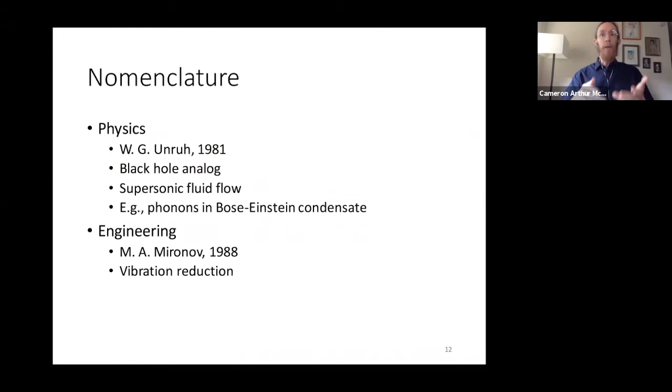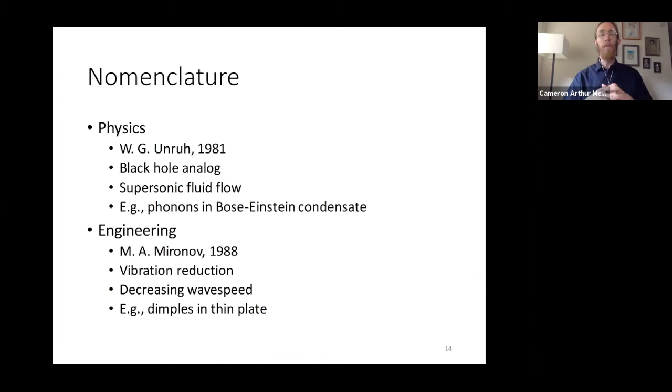In the field of engineering, the idea of acoustic black holes was first proposed by Mikhail Mironov in 1988. It's useful for vibration reduction, and it's based on the idea of a decreasing wave speed in a thin beam or in a thin plate. Some examples in a plate might be if we have some dimples in the plate, and it's a means of modifying the structure to get useful vibration properties out of it. Obviously, we're going to be focusing on the latter meaning of acoustic black hole, and so that's what we'll be discussing going forward.

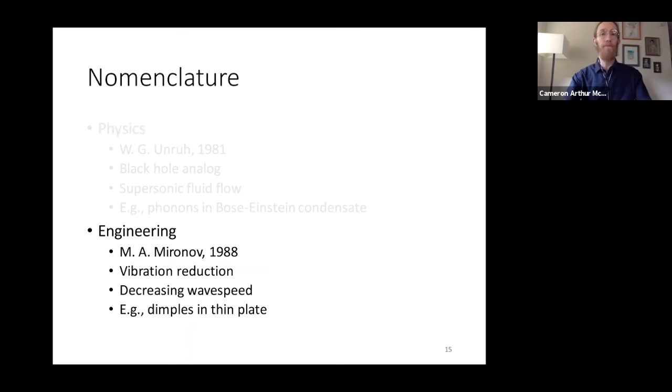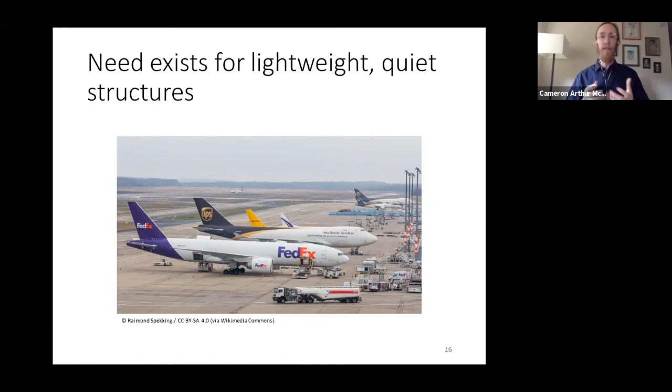I probably don't need to tell anyone here that there exists a need for lightweight but also quiet structures. It's a classical problem where we want lightweight structures that are also stiff, but that makes them effective radiators of sound. Here I have some airplanes pictured. You can also imagine that in addition to sound, we want to reduce vibration because increased vibration will wear on components and shorten their lifespan, and this is something that we want to avoid.

A common solution to reducing vibration in these thin and stiff structures is to apply some sort of damping material to it, but this damping material then leads to an increase in weight, which again is suboptimal for the consideration that we want to keep it as lightweight as possible. And so-called acoustic black holes promise a potential for significant vibration reduction, but often will lead to a net reduction in overall weight.

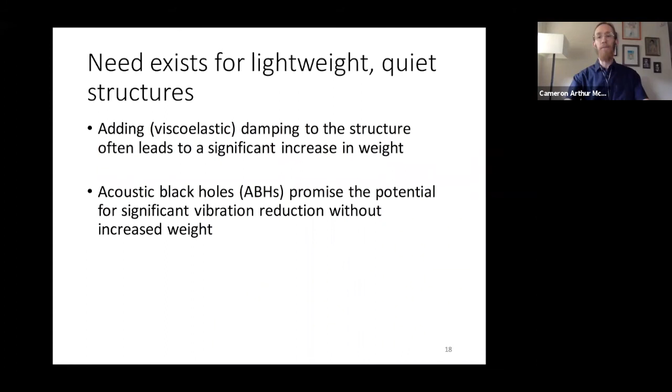The idea is if you imagine a thin beam or a thin plate, and we have a bending wave coming in at an incident direction, if we taper the thickness of that plate, then the properties are going to change over space. So if we start at some incident position, x sub I, and we go towards the origin, and it's tapered according to some profile, we can say that the transit time of this bending wave from the incident position to the origin is going to be related to 1 over the group speed. And that itself is proportional to the square root of the thickness, which is to say that as the thickness decreases, the speed of the wave also decreases. So it gets slower as it moves along.

So we can calculate this. It's going to vary over space, so we take a spatial integral. It might not be obvious, but in particular, if we have a quadratic power law, then in theory, as the thickness goes to 0 at the origin, the transit time, the time it takes to go from x sub I to the origin, goes to infinity. So it increases indefinitely.

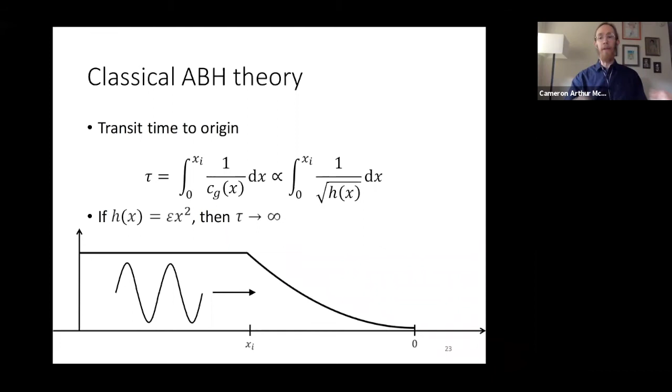Similarly, we can, using some geometric approximations, define the reflection coefficient as e raised to the power of the negative frequency times eta, which is the loss factor of the material, times this transit time. And so you'll see that as the transit time goes to infinity, the reflection coefficient goes to 0. And so this is the idea of an acoustic black hole in the ideal case.

Now, of course, if we have some non-zero truncation thickness at the end, then our reflection coefficient is going to be greater than 0. And in fact, in materials like many metals that are actually used in practice, where the loss factor is relatively low, oftentimes the reflection coefficient is going to be very nearly 1. And so this acoustic black hole effect seems to be spoiled. It seems that we can't get this acoustic black hole effect that we want.

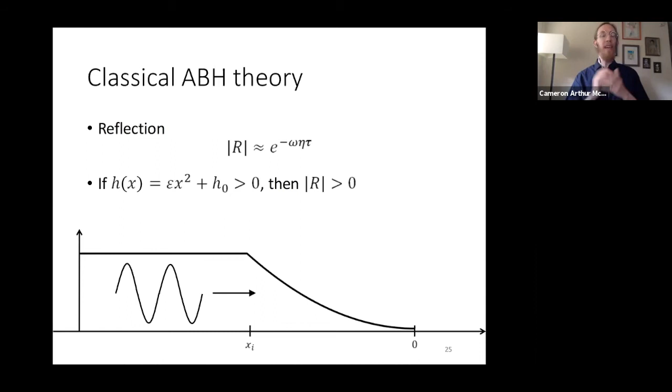However, we can use 2 additional properties of thin plates or thin beams, which is that the wavelength is going to be proportional to the square root of the thickness, and the amplitude, if we conserve energy going through the material, is going to be inversely proportional to the thickness. And so what this leads to, in terms of wavelength, is a bunching up of the wave energy because the wavelength gets much smaller. And we also see an increased displacement amplitude.

And so what this means is that we are concentrating, we are localizing the displacement energy and the strain energy into a particular region. And so this means that we can then concentrate our damping efforts in that region. And in practice, this is how acoustic black holes are implemented in real life.

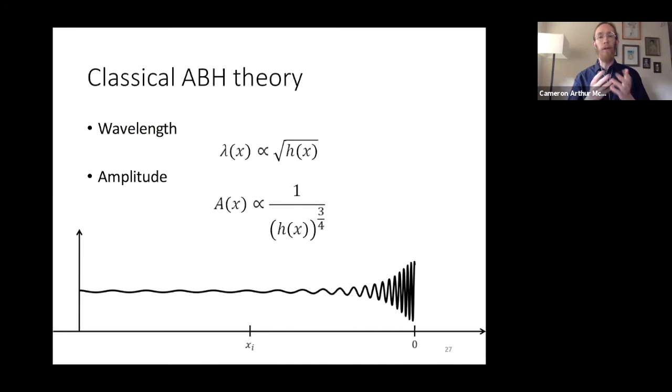In terms of what I'm calling research hubs here, there are many more researchers than I'm going to list. But for the sake of brevity, I'm going to point out some of the more prolific authors and some of the labs that have many more team members. Mikhail Mironov still publishes and presents at conferences, and he's in Moscow. Viktor Krylov actually worked with Mironov and then moved to the UK. He and Dan O'Boy are in the UK.

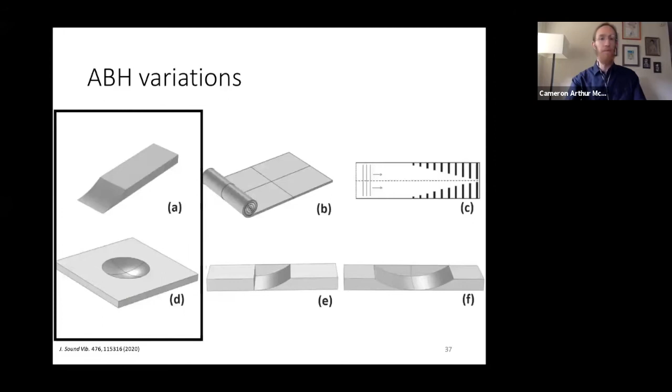Viktor Krylov in the UK was the first to suggest, well, we have this bunching up of strain energy. So even though the acoustic black hole is not perfect in practice, we can still get much of the benefits from it by adding a damping layer at the end. In the figure on your right, the solid line represents the reflection coefficient if there were no damping layer. And you can see it is very nearly 1.

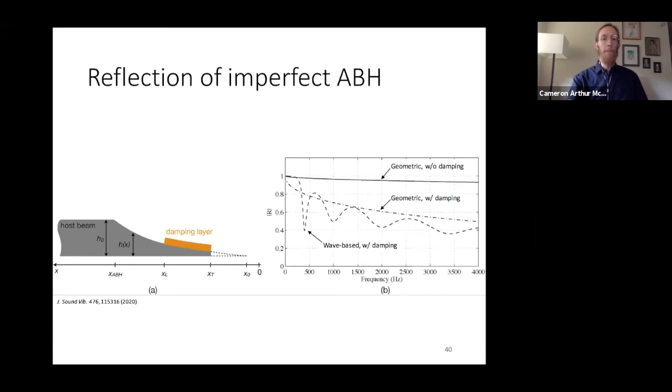Some of the first experiments were also conducted by Viktor Krylov in the UK. Here's just an example. It's a little bit difficult to read the plot, but I think the solid line is without an ABH, so it's just a uniform plate, and the dashed line is with the ABH taper at the end. And you can see that there is a noticeable reduction in the amount of vibration, especially above, say, 3,500 Hertz.

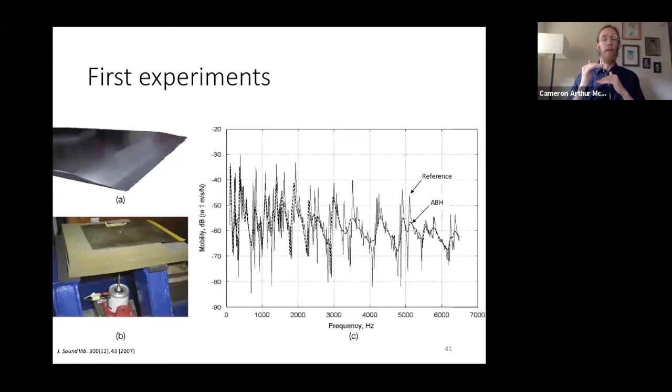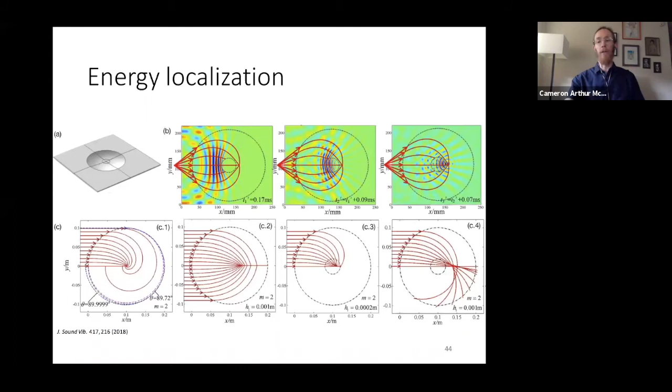Here at Penn State, Steve Conlon and his team have looked at acoustic black holes for increasing sound transmission loss. So on your left, you have a picture of the plate with a number of ABH indentations on it. In the center, it's a wave number transform. And so what that shows basically is that it spreads the energy out into different wave numbers. So rather than be concentrated around this black ring, it's spread out into a wider area out towards the white circle. And what that means is that less sound is effectively radiated.

You can think about this in terms of, for effective radiation of sound in a beam or plate, we want supersonic wave speeds. But if we slow the wave speed down in the ABH feature, then we can reach subsonic wave speeds, and therefore we have this decoupling effect is what they call it. And then on your right, we have radiation efficiencies that they measured for a number of different configurations.

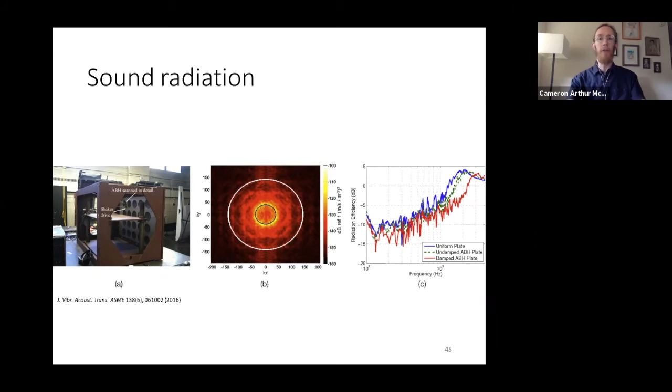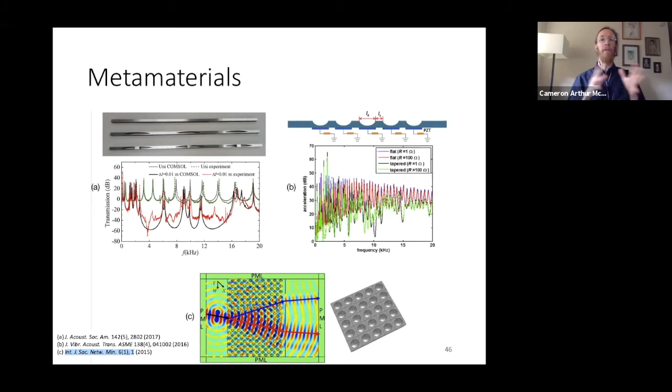As I mentioned, these acoustic black holes can be used as almost lenses. And so this pushes them into the realm of metamaterials when you have arrays of them. I'm not going to go through each of these, but just know that several different authors, such as Fabio Semperlotti at Purdue University, and Li Cheng, and a number of others I'm sure I'm forgetting, have looked at arrays of acoustic black holes as effective structural metamaterials.

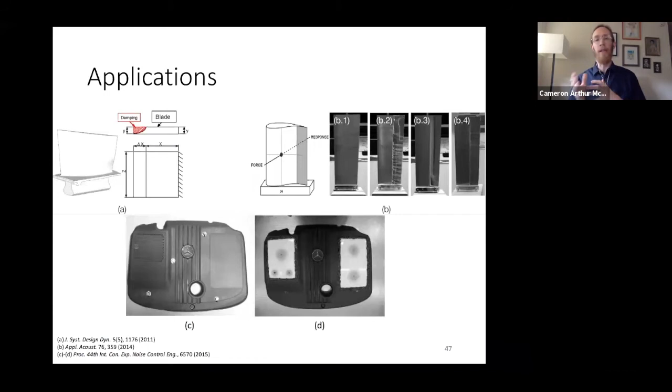Okay. So with that background out of the way, I'm going to now move on to my own research. I'm going to present an optimization study that I performed. Going back, once again, this will be the last time I promise, to this figure, I just want to explain some of the motivation behind my research. So I started my PhD in 2016. As Fernando mentioned, we took the qualifying exam together in 2017.

And one of those came before I started my PhD work. One of those came out of my PhD work, and then another was published separately by a different team while I was still doing my thesis work.

And this means that historically, there hasn't been a clear understanding of what constitutes optimal ABH design, especially in more practical settings, so finite settings, rather than considering an ABH termination attached to like an infinite structure. What happens when we apply that ABH into a finite practical structure? And historically, there hasn't been a lot of work into the optimal design.

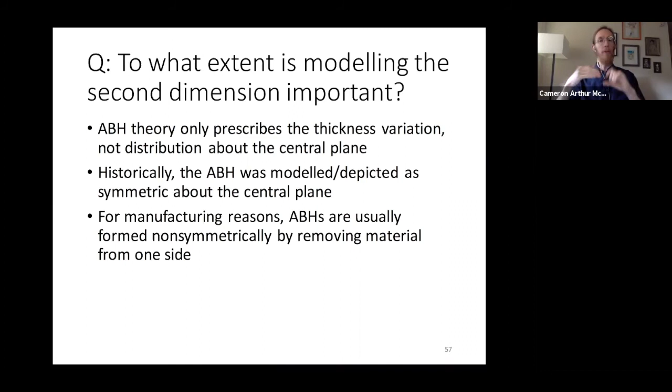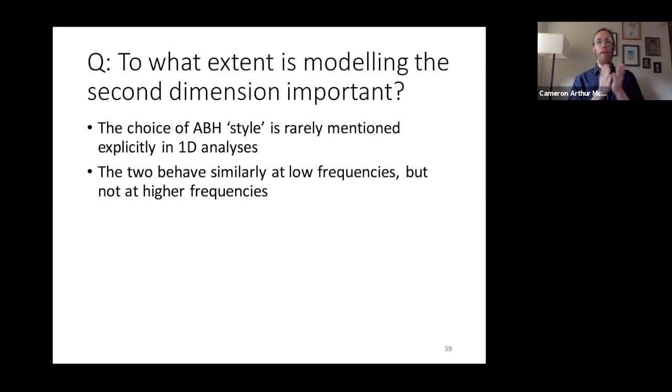And so in 1D analysis, it's rare to mention which of these two styles is being included in the model, is being analyzed. And while at low frequencies, they will be more or less equivalent, at higher frequencies, they're not going to be. They'll have different dynamics.

In addition, as a third style, we included what we're calling a double leaf style. And this was proposed by Krylov and Zhou et al. And actually, we saw a picture of it on the Metamaterials slide. And I'll show you a picture in, I think, the next slide or the next few slides.

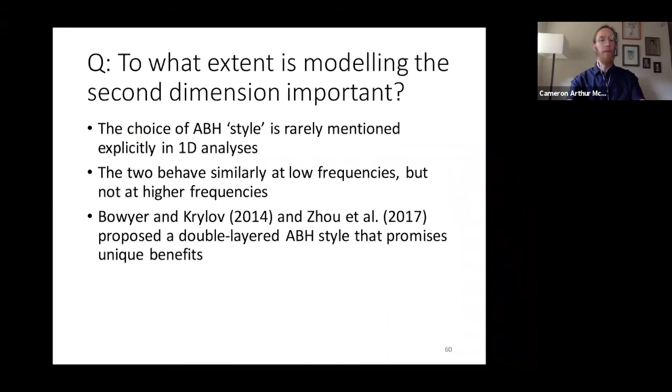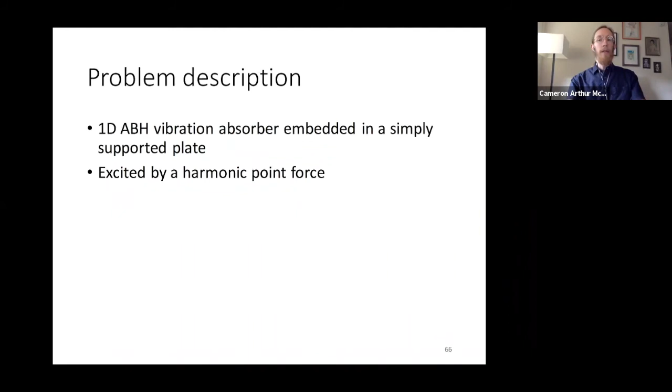The optimization problem that we're addressing here is a one-dimensional ABH vibration absorber embedded in a simply supported plate. Even though we're going to be modeling explicitly 2 dimensions, it's called one-dimensional because the thickness variation only varies in 1 dimension. It's going to be excited by harmonic point force.

In addition, we'll also vary the position, so where the ABH lands along the beam or along the plate, and we'll also be varying the amount of added damping. We'll have 2 objectives. The first is going to be minimizing the overall mass, and the second is a bit complex, but we are going to be recording the velocity response and then averaging it over the entire length of the structure, and we'll want to minimize that. So I'll just refer to that as the vibration response. So we want to minimize mass and we want to minimize the vibration response.

Here's a graphic illustration of the problem, and our design variables will have 5. The first will be the length of the ABH. The second will be the minimum thickness, the truncation thickness. The third will be that power law power. The fourth will be the position, and the fifth will be the percent of the ABH that has damping applied to it.

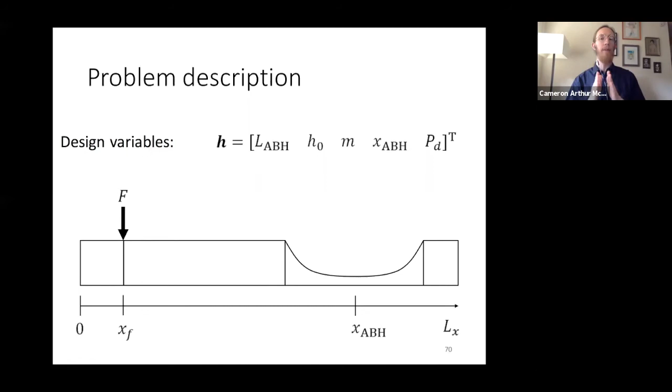Here, just mathematically, are our 2 objectives. The first one is the overall mass. The second one, again, we're calculating the velocity response, and we're going to average that over the entire length. And then we'll also evaluate that in some bandwidth and then take an overall average at that. We'll integrate across frequency.

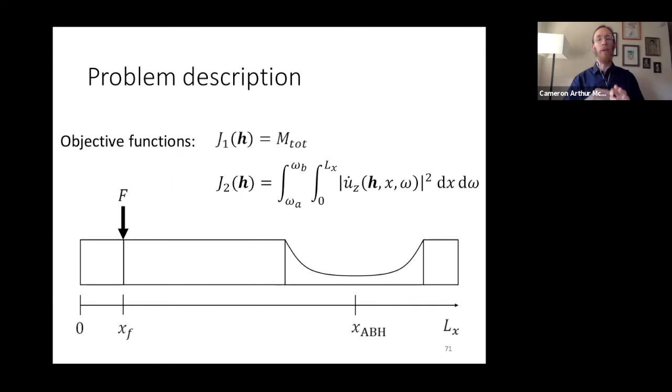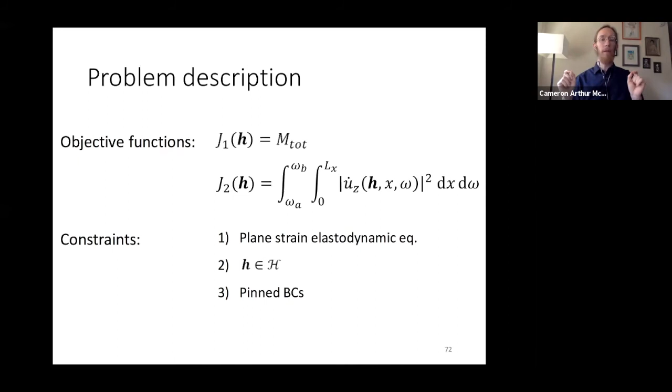In terms of constraints, the dynamics will need to satisfy plane strain elastodynamic equations. The possible designs will be limited by the upper and lower values of each of the 5 parameters. And then the end boundary conditions for the plate will be pinned boundary conditions.

Our numerical model looks as such, so we'll have a multi-objective evolutionary algorithm as our optimizer. And then for the finite element analysis, we'll be using Nastran. So we need some way to connect these two. And for that, I wrote a number of bespoke scripts and functions in MATLAB.

And it works by first, our optimizer will pass the 5 design variables to the MATLAB functions. It will take them in, process them, and then write out analysis files that can be read into Nastran. Nastran will perform the analysis and then pass nodal displacements to our MATLAB functions, which will then post-process the results and give the 2 objective values to our optimizer.

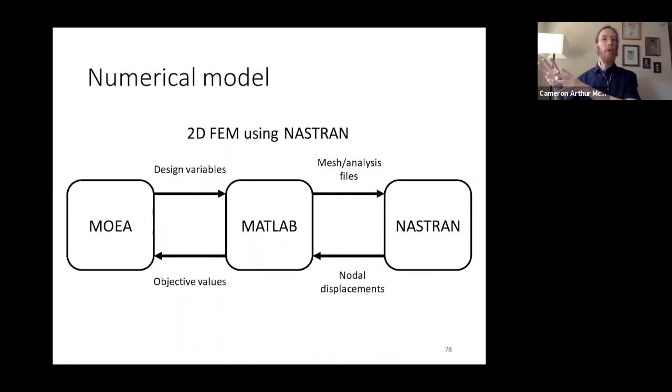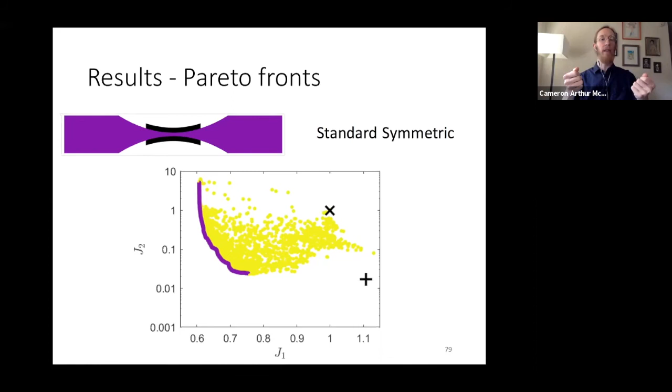So that's to say that from our unmodified beam, we can design an ABH such that we lower mass and lower the vibration response, and there's not a trade-off between the 2 objectives. And so this is remarkable that we don't have this trade-off right off the bat. We have a region where we can improve both objectives before we have to give up something to gain in another area.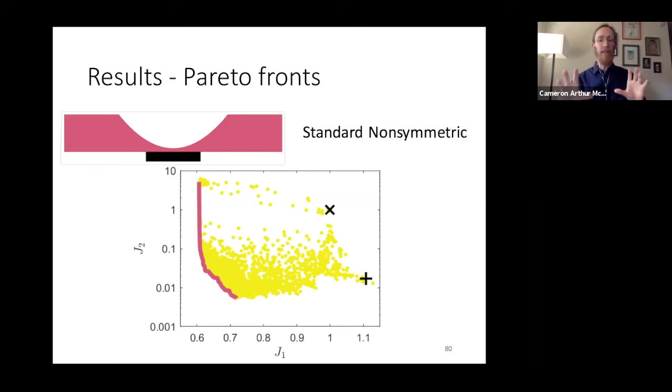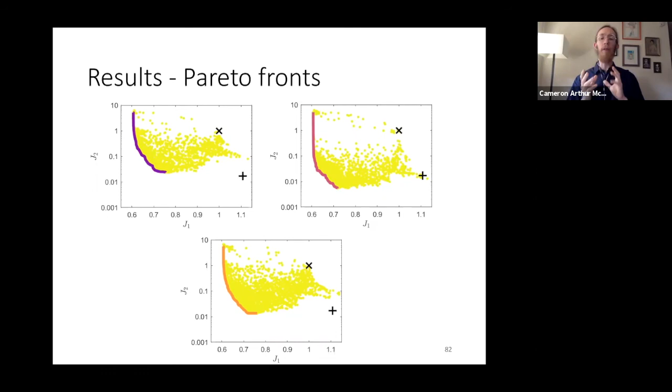Here is the same plot for the non-symmetric style. And you'll see that overall, the shape of the objective space is similar, but it's different. Similarly, for the double leaf style, we have a similar objective space, but again, it's going to be unique. And just to compare the 3 together here, you'll notice that the pink curve, the non-symmetric style, makes a better use of the mass. So for a given amount of mass overall, it is able to lower the vibration response greater than the other 2 styles, which is significant here. You'll see that then in second is the double leaf style, and in third is the symmetric style.

We can take each of these Pareto fronts and stretch them out, and then plot each of the 5 design variables according to that Pareto front, and see the trends in the design parameters. So you'll notice that there's not a lot of variation in the length or the minimum thickness. There's some variation in the taper power. There's some ambiguity, especially at the upper range, where we're minimizing the response, but we are increasing mass. And then also in the position, there's some wiggle room there.

What's noticeable is that there's a strong dependence on the amount of damping. So what I've plotted here instead of the percent damping is the absolute length of the damping that's being applied. You can see that it's very nearly a linear dependence. So we see that in addition to optimal ABH design, it's critical to properly design your damping being applied to the ABH.

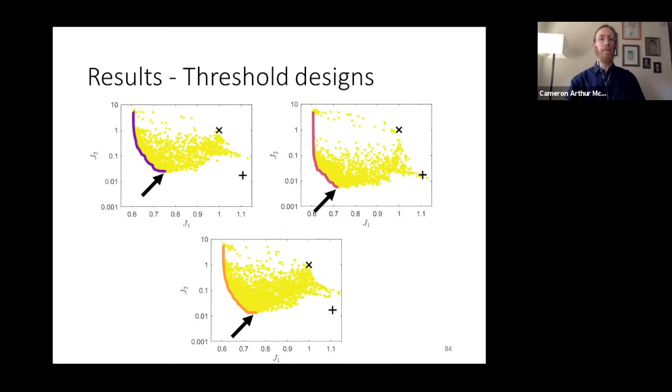We can now look at what I'm calling these threshold designs. It's the threshold of the Pareto front, and we can look at some of the properties of those 3 designs compared to one another. So for example, here's the spatially averaged squared velocity spectra. So this is just our second objective, but rather than integrating over frequency, we're evaluating it as a function of frequency. And so for reference, we have the uniform beam with added damping as a dashed black curve here.

And you can see that in all three cases, we have a greatly increased number of peaks. And this again goes back to our idea of an increased modal density by including an ABH feature. And although it's on a logarithmic scale, it's a little bit hard to see. It's significant that even though we have this increased number of peaks in the spectra, the average value is remarkably lower than it is for the uniform beam, even with damping.

Another thing to note is if we look at the pink curve again, the non-symmetric style, we see that there is much less vibration, much less velocity response compared to the other two spectra, and that plays out in our objective value and our Pareto front that we saw before. And then also for the double leaf style in orange, we see an increase in modal density, but it's even greater for the double leaf style compared to the other two styles.

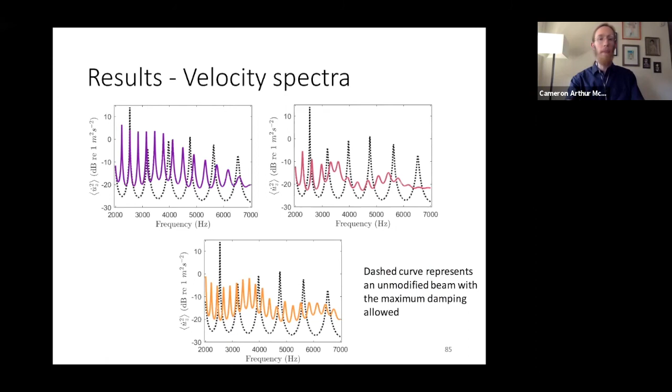We can also look at, although this was not included in the optimization problem, radiated sound. So this was calculated for far field radiation using the Rayleigh integral. And this is more effectively a radiation per unit width because we're only looking at a two-dimensional slice of like an infinite plate. So this is radiated sound power per unit width. Again, the colors correspond to each of the three styles, and the black bars correspond to an unmodified uniform beam with damping added. And you'll see that all of the three ABH styles outperform the unmodified beam, even with damping, in terms of decreasing the amount of radiated sound power.

Now, compared to one another, the symmetric style is absolutely less effective at reducing the amount of radiated sound compared to the other two styles, which perform comparably to one another. So the non-symmetric and the double leaf styles perform comparably for reducing radiated sound power, then the symmetric style, and then last is the unmodified beam, as we expect.

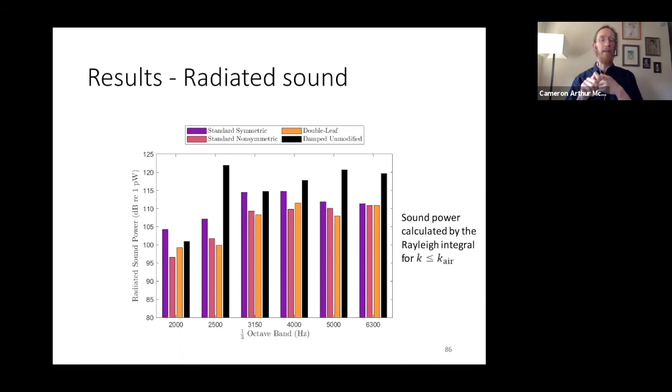So coming back to our original question, how important is it to explicitly model the second dimension? Well, it turns out that it's absolutely critical because all of the variations we see in the results here are due to the choice of style, right? So some of the key takeaways from this study: first of all, at the time it was published, it was the first to directly compare these three styles, which are common in the literature. And there's a citation in case you want to go find it.

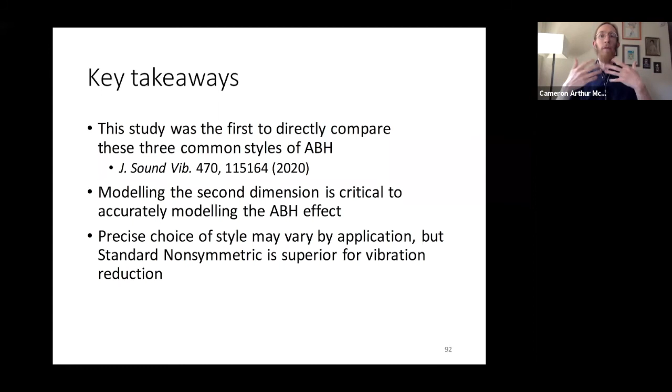It showed that modeling the second dimension is critical for accurately modeling the ABH effect. And while the precise choice of which is best might depend on other external goals, the non-symmetric style seems to be the preferred style of the three for vibration reduction. It also showed, and this was not expected at the outset, that the damping design can be critical for effective ABH performance. And it should be noted that following the presentation of these results, multiple studies came out afterwards explicitly looking into the design of the damping application to the ABH.

Okay, so I'm just going to finish up now with a few concluding remarks.

In summary, we saw that the so-called acoustic black hole effect really has, in this context, nothing to do with in-air acoustics. But the acoustic black hole effect, as it's come to be known, is produced by tailoring the thickness of a beam or a plate using a power law profile with a power of 2 or greater.

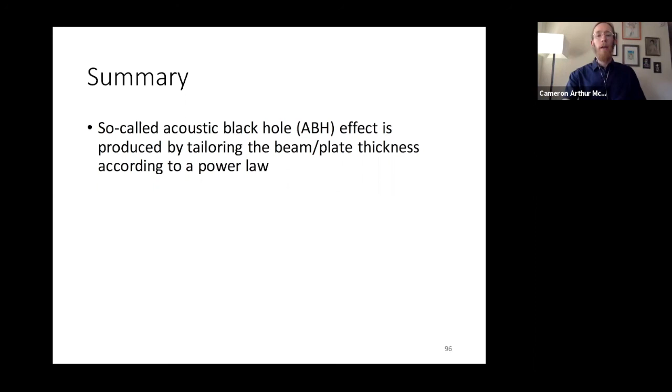What this does is it creates an area of smaller wavelength and larger amplitude, which localizes the strain energy so that we can more effectively concentrate our damping efforts in a smaller area. Additionally, for radiated sound, it results in a slower wave speed, which produces this acoustic decoupling effect, so that ABHs compared to unmodified structures are relatively poor radiators of sound.

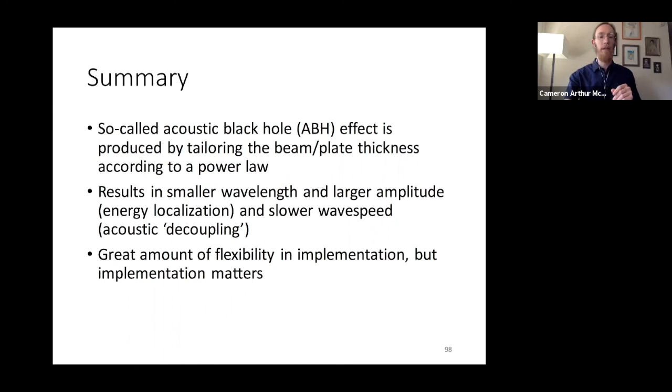There is a great amount of flexibility of variation in how an acoustic black hole feature is implemented in practice. But as we saw from the optimization results, how it is implemented matters greatly. And we also saw that the particular design of the damping layout is a very important factor as well. And so these two should go hand in hand.

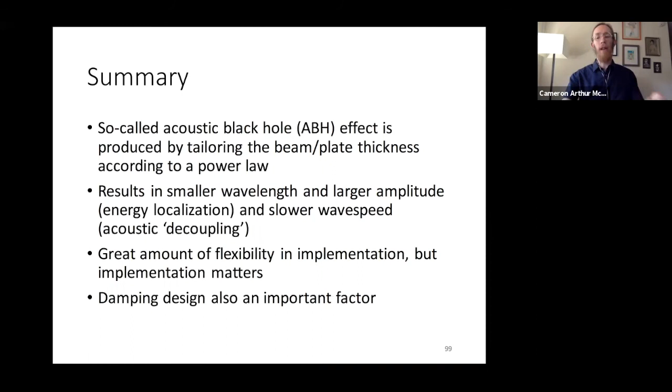As an epilogue, something to finish off with, it should be noted that very similar analysis to what we saw with bending waves in a thin beam or a thin plate, going to 0 wave speed, not being reflected back, can be carried out for in-air calculations in one dimension. The analysis works by using the Webster-Horn equation and including a term for wall impedances.

You can get the same effect using, again, a power law, although it will also work for linear laws. So it doesn't have to be a power of 2 or greater, it can be a power of 1 or greater, and you can get, in theory, the exact same effect. This has been an area that's been historically relatively untapped. There have been a few exploratory investigations. I've seen one paper that looked at muffler design using what are called sonic black holes to differentiate them from acoustic black holes.